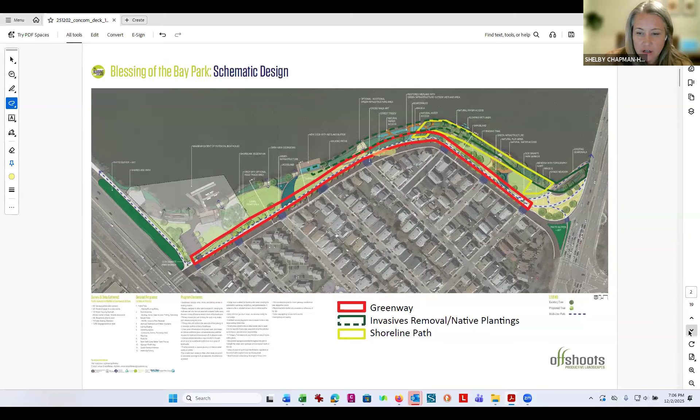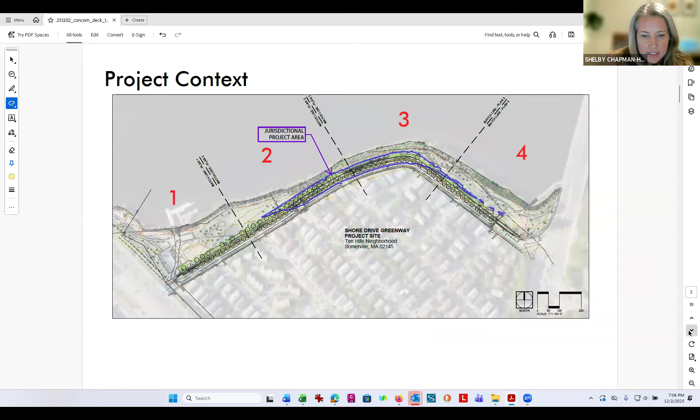So we're just going to really quickly take you through some existing site photos in case you're not frequently in this part of Somerville. So we'll go from page left to right, that's west to east, starting over by Mystic Ave, where the 1 is, over to the Fellsway by the 4. So if we go to the next page. So here you can see some existing conditions. This is over by the Blessing of the Bay Boathouse on the far west portion of the project site.

And when we get to the plan proposals, you'll see we were really working with DCR and City of Somerville to try to stick to that plan that the community developed back in 2018 and tried really hard to look at a lot of alternatives and really analyze the site to say, how can we maximize reusing existing hardscape? So you'll see that where we have now existing on Shore Drive, a parking aisle, two-way drive aisle, and a bike lane, and then a sidewalk that's starting to get into the Blessing of the Bay Park area.

Our proposed adjustments go into the bike lanes and reclaim a little bit of that space to create a planted vegetated strip that has a couple of different functions between the roadway and the existing sidewalk. You can see there's some existing trees very close to where we are working. We are proposing removing 10 trees that are non-native or invasive species that would have significant impact from the work coming right up to the trunks. And you'll see in a minute, we have 88 new trees that we're proposing as well to replace those. So that's a very typical condition.

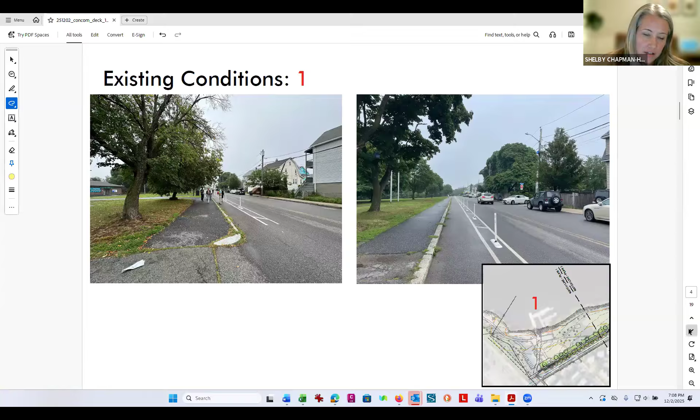And then we go down, moving towards the east here, you can see there's some areas where it's a little bit more opened up and park-like, but that same kind of condition of two drive aisles, parking, roadways, all very similar through that space. There's some areas where there's some traffic calming existing, which is really great that we're working with.

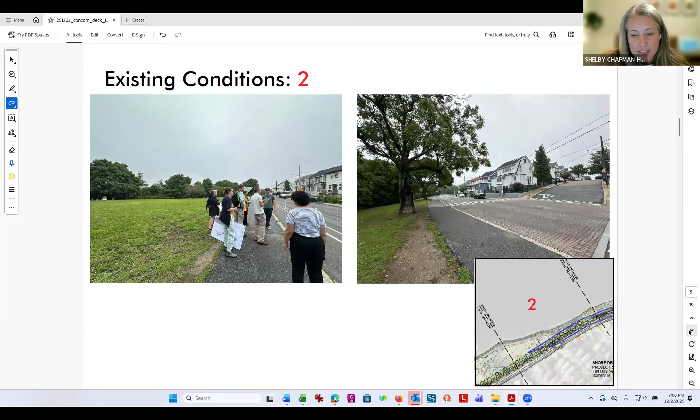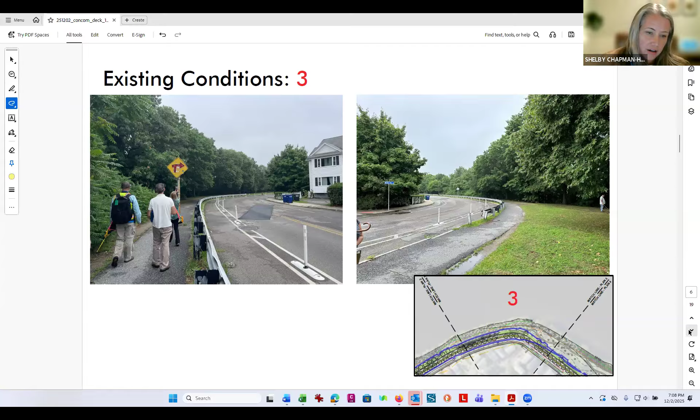And then if we go to the next plan, there is one area that gets a little bit pinched, but there's actually extra roadway width there due to the turning radius of the cars. So still plenty of space to work within for trying to really reduce our impact on the existing areas that aren't paved.

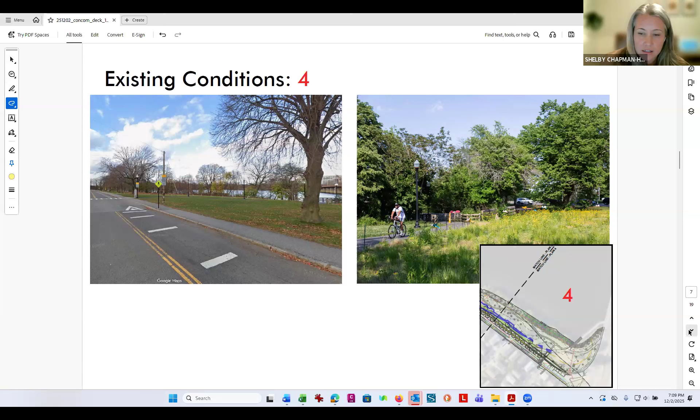And then if we go to the last slide, we are on the east side of the site near the boardwalk where you can go down under to get to Baxter Park and Assembly. This is the area where we've been to you guys a few times about various parts that we've picked off over time, including adding the native pollinator meadow and native shoreline restoration. So considering all of those aspects as we go through the proposed plans, which I'll hand it over to Brian to start to walk us through the proposal.

Thanks, Shelby. As Shelby laid out, the project area is really along the Shore Drive corridor. The entire limit of work is approximately 95,000 square feet or 2.2 acres. About 39,500 of that is occurring within the 100-foot buffer zone. You can see there we are in a Zone AE floodplain and regulatory floodway, but all of our work is entirely outside of that area.

We do have a couple resource areas within the park, and although there's multiple jurisdictional areas present, all of the proposed activities associated with this project are confined to the upland portion or the 100-foot buffer zone to the BVW and the bank. And then the underlying soils, as you can imagine, it's mostly a fill type of material. And we did complete some site soil evaluations in December of last year, December 6th, almost a year from this current date. And that was used to help inform the stormwater management decisions that you'll see tonight.

What this plan shows is we've highlighted the jurisdictional area in yellow. This is really the portion of the project that falls within that 100-foot buffer zone, and that's what we'll be speaking to tonight. Some of the proposed improvements that we'll be looking at is a shared use path between Shore Drive and the park. We're also hoping to improve access, safety, and aesthetics along Mystic River and Shore Drive. There will be a road diet, and we're looking to reduce the width of the road, hopefully to reduce speeds and the impervious road cover.

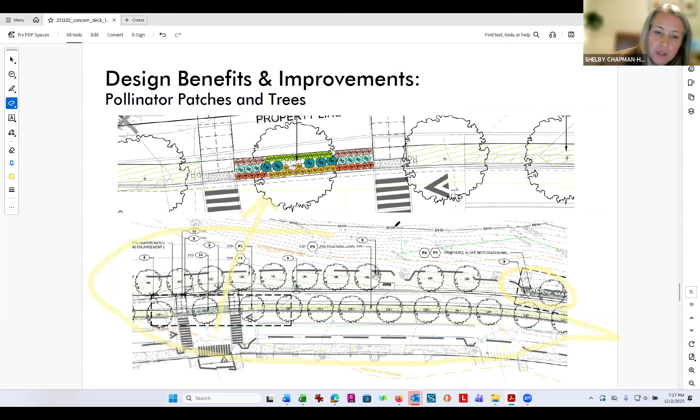And then there is a small patch of restoration on the far right side of that bottom overall plan. You can see a green hatch north of the shared use path, where that tight area is a little bit more wooded in the existing condition, restoring that back with appropriate native woodland edge species. That's it for the planting part. I'll just turn it back over to you, Brian.

Just walk through this really quickly. The roadway is being reduced, as I mentioned, so there's a reduction in the impervious cover. Because we are making this a shared multi-use path, there is some path widening that increases that impervious cover, and there's a little bit of trail surface aggregate that we're using in the connection points, and I think for some of the bench areas. But overall, we're still providing a reduction in impervious cover, and it's really swapping the pathway impervious with roadway. So we see that as a win as well.

I think it's also important to note that the lawn area, there's a pretty good reduction there, and that's due to the addition of that landscape strip that Shelby mentioned, as well as the pollinator plantings and some restoration plantings as well. So I think overall, this is a project that should provide some benefits to the abutting resources.

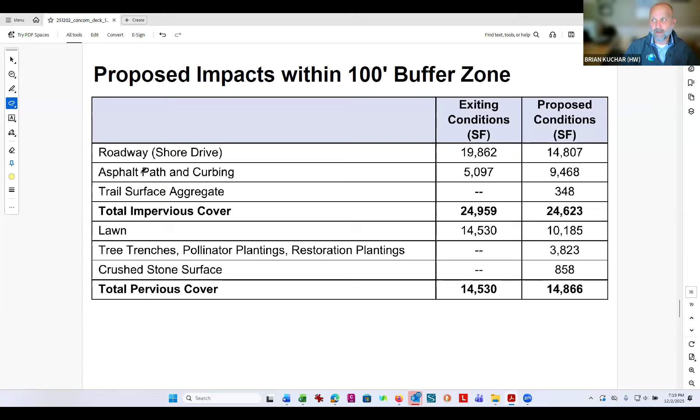And I think at that point, yeah, I am going to stop talking and let you all weigh in. I will keep sharing my screen in case there are things people want us to go back to, or if it's helpful when we're answering questions, or if not, I can stop sharing so we can all see each other again. Why don't you keep it up for now? Because I think some of the questions might want us to go back to them. I do want to open it up to fellow commissioners. Does anyone have any questions?

If no one does, I do have a couple questions. The first question I had is with regard to the tree removal plan, Shelby, that you referred to. I was wondering whether we have received a map that marks the trees that are planned for removal, and whether you've been working with Malik or our other tree specialists. Yes. So we've been working closely with the folks at PSUF, and we've been working with Vanessa Buckley. And in the plans in the NOI, there is a demo plan that shows the trees noted for removal.

Okay. And then I was just going to say that I can second that too. So I'm Meg Koglin. I have video off because I'm actually on vacation right now, but this is an important meeting, so I wanted to be here.

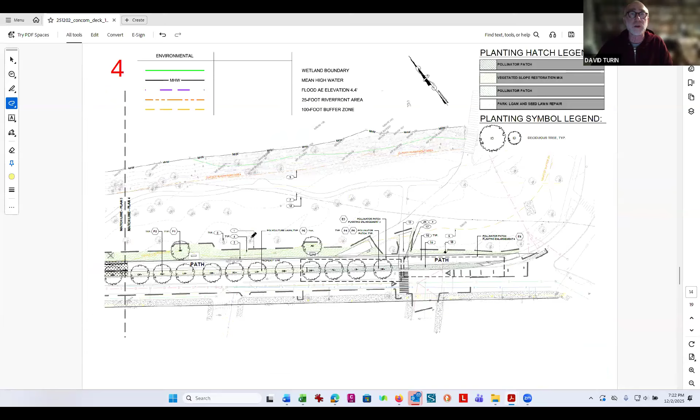The question I had about the path, and I feel like every different NOI, what I'm getting to is pervious versus impervious material for the path. You guys have chosen impervious. I know some projects come before us with the decision to put pervious pavement. Like 207. That decision. Yeah, I can speak to that. We did look at porous materials for the pathway. There were some challenges as it relates to the water table and the soil conditions there for infiltration. And in fact, we are under draining our tree trenches because of that reason, that we don't really have well-drained soils. And then we're trying to maintain separation from the water table as well.

So due to the high water table and the soils, and there were some other factors that weighed in as well from the design side, we decided that we would use just the more traditional pavement, but keep in mind that we are including the structural sand-based soils underneath, and we are using underneath that pathway for stormwater storage. So you are getting some of that benefit of the porous, you're just not getting the direct surface infiltration. And that's actually a good segue. Can you talk a little more about the stormwater treatment that you're putting in?

Sure. So there are the tree trenches, which I pointed out here. There's 4 of them. The way that this works is the water comes down the gutter line, enters into this small sediment forebay that would allow your solids and trash and debris to settle out. Easy maintenance that someone can go in and just clean that space. It would then overflow for the water quality volume, again, sized. Some of them are slightly under, but again, we're trying to meet to the maximum extent practicable based upon some of the utilities that are out there, which created some challenges as far as putting stormwater into the ground.

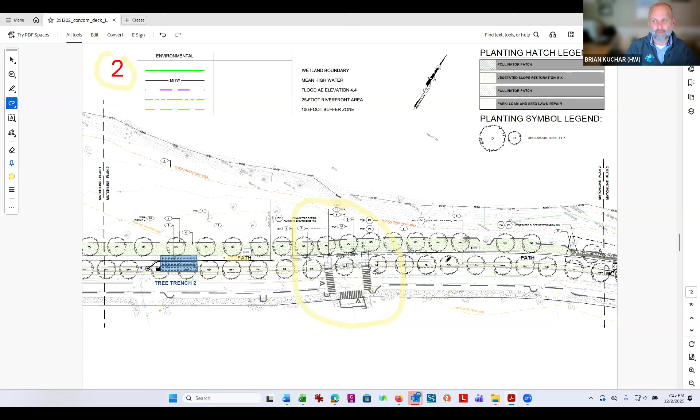So there'll be some sort of a regulator structure or a passive regulator structure to direct the first flow into that detention basin, and the overflow will then pop out again? Yep, that's absolutely correct. It will come into this. There'll be a slight depression, and there's an inlet in the curb line here that will allow that water to get in.

And really what's regulating the flow is this structure here, which I believe is a 12-inch PVC drain basin, and then the pipe, which I believe is 6 inches. So that's really regulating the water quality. And then once this fills up, the water is just going to continue on in the gutter line.

It's a more cost-effective approach because it doesn't require us to put a much larger structure in and make these connections. And it really allows this system to just take the water quality volume, or as I said, in this case, probably slightly less than the 1 inch, but definitely the ½ inch. Okay.

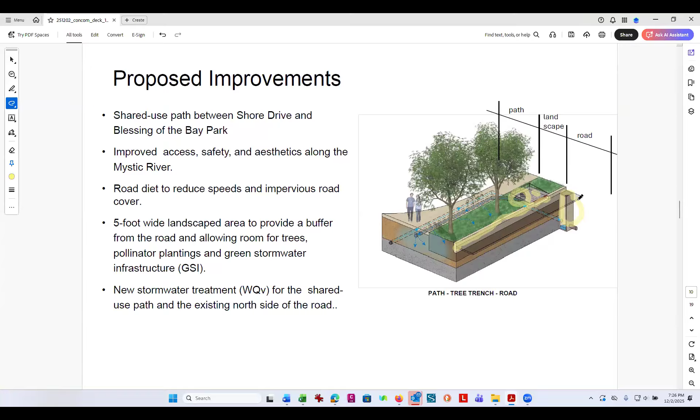Any commissioners, anyone else have questions? Yeah, I do. I was wondering, for the area that's in the 100-foot buffer zone, what are you doing for sediment controls? Just to clarify, you're talking about during construction, correct? Yes. So we do have an erosion control plan and site preparation plan that we submitted. We have silt sock. I can pull that plan up. Hold on a second. Are you seeing the new plan set, or are you still seeing the presentation? Yes.

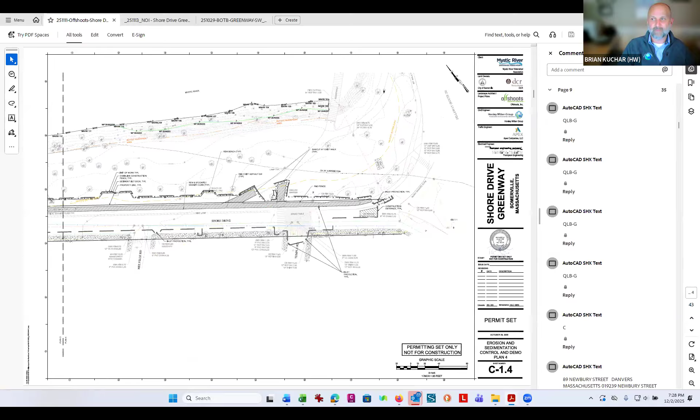So on the erosion and sediment control plans, we have a silt sock along the perimeter within the landscape to protect against any runoff that may be leaving the site. The good news is this site's relatively flat, and I think stormwater management during construction should be not too complicated. We also have silt sacks going into all of the catch basin structures, not only the ones that we're disturbing or working with, but any catch basin within the limit of work, because of vehicle tracking or things like that. We've also made contingencies for some level of vehicle tracking once the construction access point is determined.

Yeah, go on, Michael. I was gonna say, you feel confident that nothing is gonna be running off from this work site into the river? As long as the contractor follows the erosion control plan, yeah, I think it should sufficiently protect it. And who's gonna be keeping track of this? Is that public space, or, in terms of the contractor, you mean? Yeah, because last time you guys were a little lax on your erosion controls, so I'm a little concerned about that. I would love to learn more about what project it is that you're referencing.

But PSUF, the Public Space and Urban Forestry team, will be the project manager on this for construction. And we would be working very closely with Offshoots as the licensed landscape architect on the project, so we would be the ones that oversee construction. Okay. As the designers of record, we wouldn't be doing daily observation of construction, but we would be out there to do spot inspections, and we're usually pretty vigilant on the erosion control when we go out there.

So even if we're not specifically out there to check erosion control, we're typically looking where sediment may have accumulated, because that's when you run into problems, right? If they haven't cleaned up when the erosion controls are doing their job, and then you get a big rain event, it overtops it. And we typically manage by weekly site visits. And if there's a particular need to go more often, my experience with being on the PSUF team on active projects is we will make a point of going there if it's needed, but generally speaking, once a week.

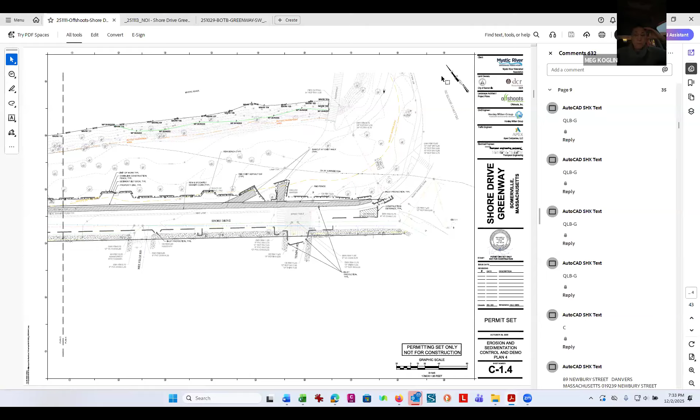I should have started with this. It looks like a great project. I think all the improvements along the waterfront there are broadly welcomed, and I should have said that before starting the questioning. So thank you for coming to us with this project. Thank you.

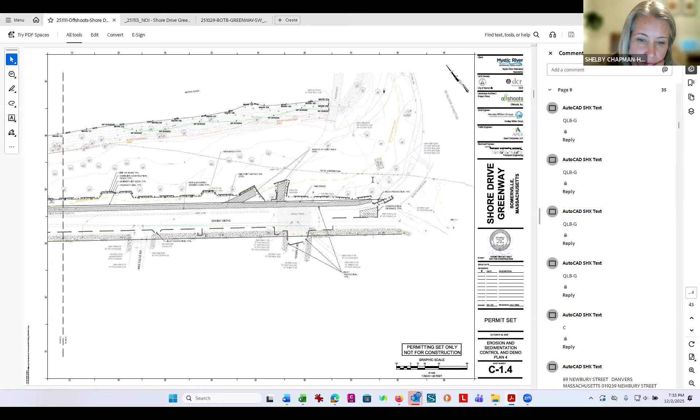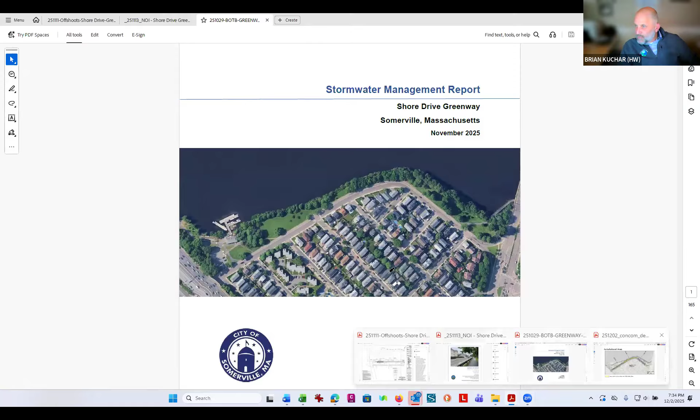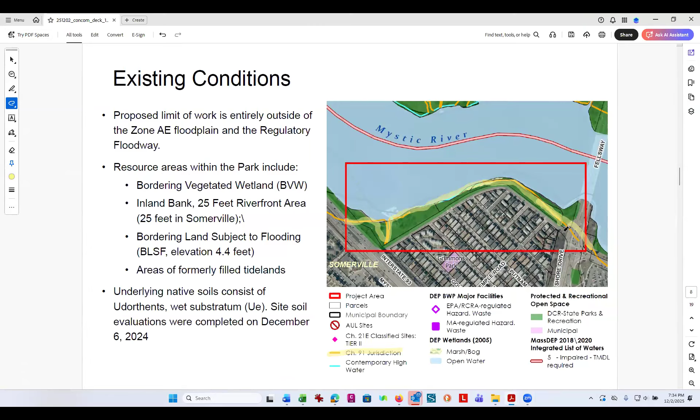Quick question. On one of the slides before, it looked like there was Chapter 91 jurisdiction nearby. Is any work taking place in Chapter 91? Very close nearby, but no. Isn't this all filled tideland? So Brian, do you want to point to it? It used to be a salt marsh. Oops, you guys are seeing the wrong plan. Yeah, this is the line right here, Chapter 91 jurisdiction. Oh, okay. I think one of the previous projects was in it, and we came in front of you, but not this one, because it's so close to the road.

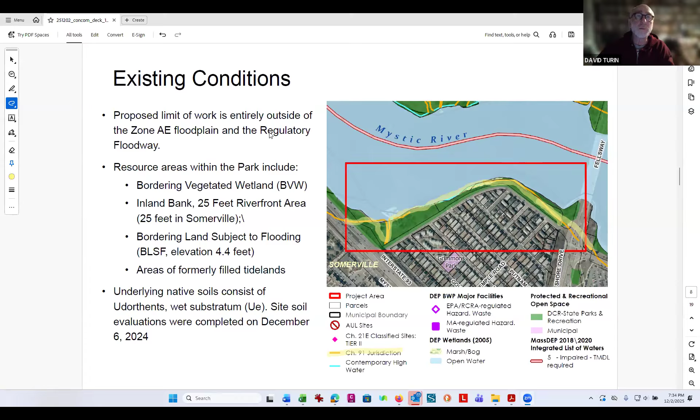What level of equipment are you going to have, and is it going to be parked on site? Specifically, I'm concerned about oil and gas filled equipment. I think the equipment you would have on site would be similar to any sort of roadway project: excavators, dump trucks. We're not repaving the entire road, so you don't really have that level of construction, but it's going to be mostly earth moving with the excavation and the installation of the path.

Will the stormwater pollution prevention plan cover protection for that equipment? Yep, absolutely. That would be covered in the SWPPP. Yeah, that's fine, and I'm happy for us to defer to that. Okay. Anyone have any other questions? I've got a question before we move on.

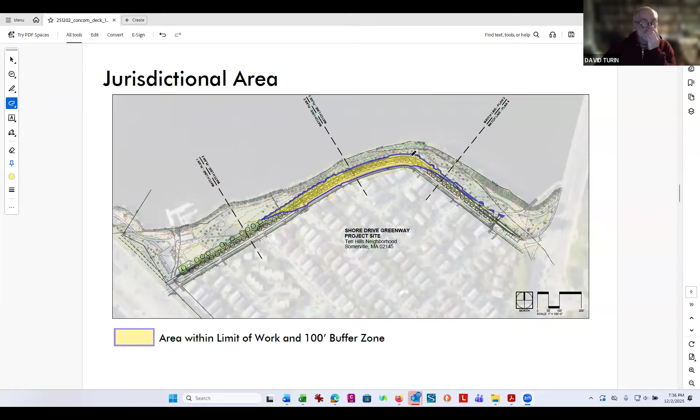Can we go back to the structural stormwater controls for a second? Can you walk me through some of the calculations for phosphorus and sediment removal? I'm specifically thinking about how much coordination you had done with the city departments to make sure you're meeting their requirements for redevelopment that would require you to remove a certain amount of phosphorus and sediment from the overall load of the final conditions that you anticipate.

Sure. So the stormwater practice that we're using, as I mentioned, is a tree trench, which gets a phosphorus reduction. I don't want to misspeak on this, but I can provide that information. But it does provide a level of phosphorus reduction because, as I mentioned, although we don't have great infiltrating soils, we are getting a level of infiltration and then plant uptake. So we did look at the phosphorus reduction.

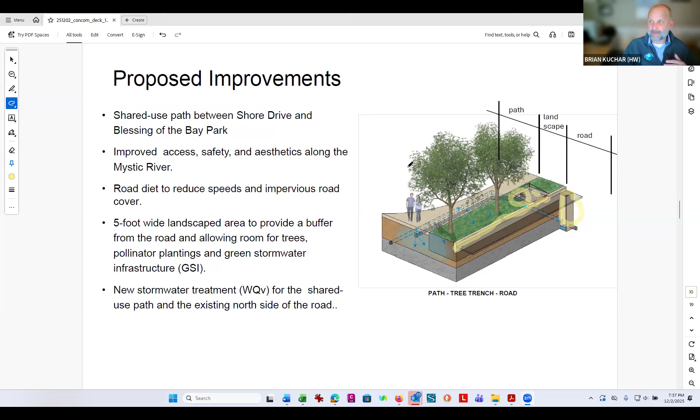I also mentioned we're trying to meet to the maximum extent practicable because we do have some site constraints that limit what we're able to do both at the surface and below the surface due to the utilities. There's quite a few utilities because, keep in mind, as I mentioned, we're reducing the road width. So where a lot of this landscape buffer is located is currently road where the utilities are located.

So we did a ground penetrating radar survey to try to really pinpoint those utilities. So we are providing a level of reduction. I can give you additional information on that if required, but I don't have that right in front of me.

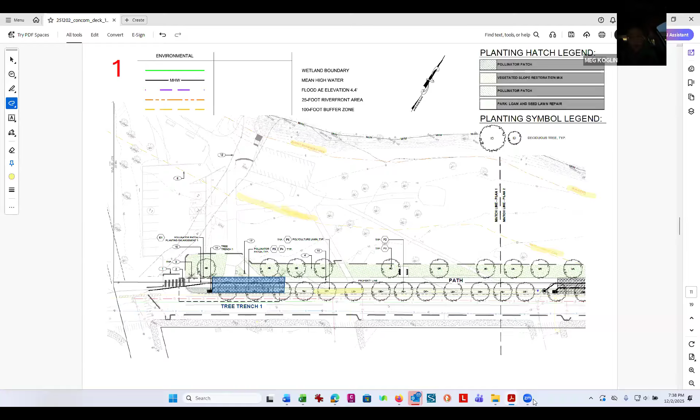And then what I'd like to add in terms of City of Somerville coordination is that at least over the past year, going back to early fall of 2024, we have been including the city's engineering team in all of the reviews. So the director of the city's engineering team has actually been the one giving the review comments at each of these phases.

And then in the last 2 reviews, in this coming one, and in the final approval of construction documents, we also have included Stephanie, whose last name I'm forgetting right now, but she manages the city's GSI program. So she has been looking at these in detail, and we've been talking back and forth. So I'm unfamiliar as to the specifics in terms of phosphorus counts, but I know that Stephanie is responsible for looking at whatever is required of our GSI. And I'm happy to follow up and facilitate if we need specific numbers.

Additionally, it's related to earlier comments, but one thing that feels important is, just as Shelby mentioned, the closer view we had on the trees and choice of plantings, especially as it comes to the reality of maintenance and what we can and cannot keep up. That's been critically important in looking at this site, especially with learnings in other areas of the city, like Somerville Ave, and we feel confident in the maintenance that we can keep up.

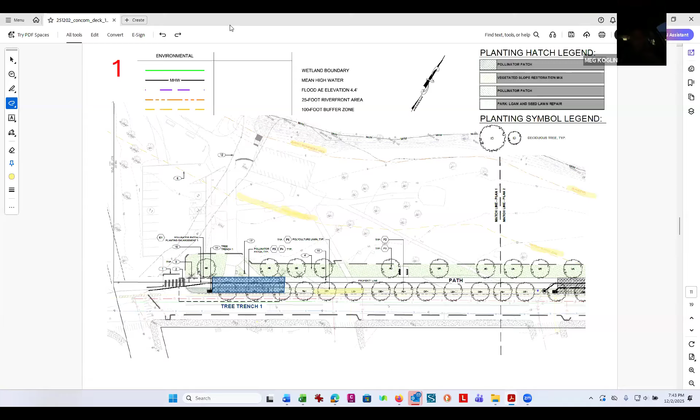Absolutely. Well, I'm very happy you said this exactly when you did, because we are at one of those facilitation points. There has been coordination with all the teams who are responsible for stormwater in the city with engineering. But that specific question is something I'll bring forward right now when we provide our comments on the 90% construction document set before they go to 100% due at the end of January, to make sure that we answer, are we meeting the city standards? So thank you for that. Yeah.

Any other questions or discussion? Just out of idle curiosity, do we have a species list for the trees you're proposing to put in? Yes, you do. We do. Go ahead. If it was in the plan, I missed it. I may have overlooked it. It is in the plans. There's a lot of sheets in there. About halfway back, at the beginning of the planting sheets, there is a comprehensive plant list page. There's a tree schedule. Okay, I'll look it up.

Thanks. Thank you. This is another one we've been coordinating on too. Offshoots presented it, and as you know, Offshoots was a co-author or lead author on the pollinator action plan and species. And then Vanessa and 3 other PSEF members also looked at the list from Offshoots in previous reviews, and we will in this next one as well.

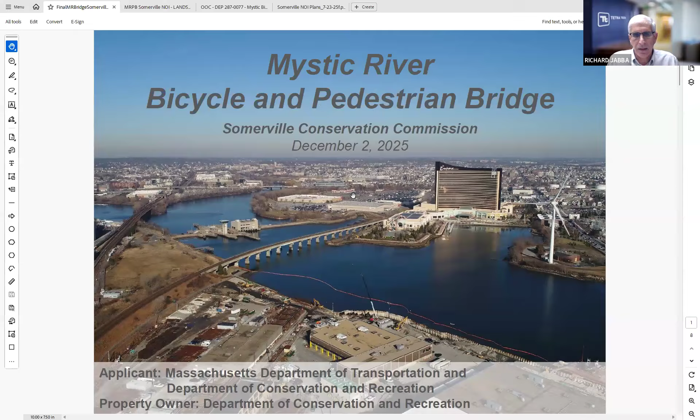So for this project, we're seeking an amendment to the existing order to add in the landscape plan. And I'll have just a few slides I want to present to go over what that is. I'll share the screen. There we go. Can you see that? Yes. Okay, great. So as I was saying, this is for MassDOT and DCR for the proposed bridge project. We were in front of you several months ago to get the order of conditions. Can you see the change in the screen now?

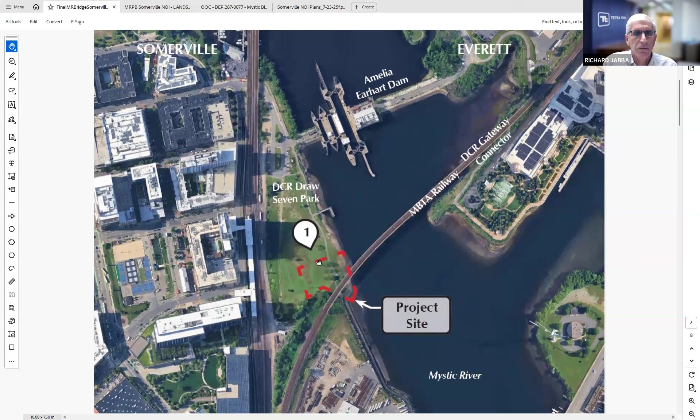Yes. Okay. So the proposed project, as you know, is the Mystic River Bicycle and Pedestrian Bridge. The landscape portion of this project is on the Draw 7 Park, as circled by this red line. This reflects existing conditions of the park just prior to construction; the park is under construction at this point. So the purpose of this amendment is to have the landscaping that was approved for the Draw 7 Park construction be switched over to the bridge construction, because the park will be completed shortly, in the next few months, and the bridge project won't start up for another year.

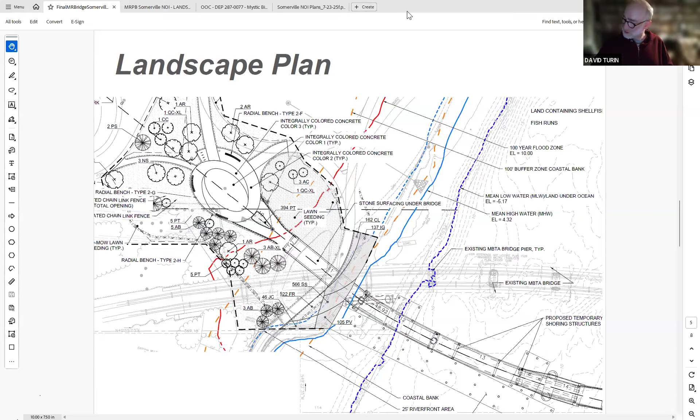Is anyone prepared to propose a motion to amend the DOT's order of conditions to include this landscape plan? I'll make a motion. I'll second it. Thank you. I will call the roll. Susan, yes. Newt, yes. Michael, yes.

Megan? I'm not sure if I need to abstain from this. Malik, I don't know if you know, because it's connected to Draw 7, and I recuse myself from that project. So I might just abstain from this vote. Okay. Well, in this case, you're voting on DOT's OOC. Right. But presuming we have enough votes without you, it's fine with me. And I think we do. We need 4. So if you're more comfortable abstaining, you may abstain. Yeah, I think I'll abstain from this.

Okay. So Megan is abstaining and I vote in favor. So it's 4-0-1 for people keeping track. And so Malik will draw up the modification and we'll let you know when there's something ready for you.